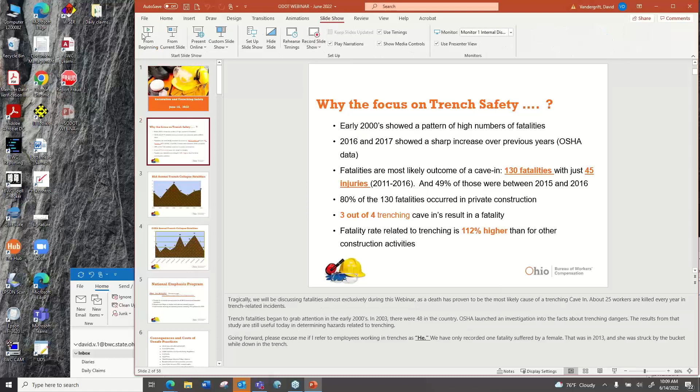Mr. Fitch, I have lost control of my screen, I can't forward the slide. Would you prefer we hand over presenter mode to David? I think it's a good idea. Let's do that. It seems it happened when I turned my camera off, and I tried turning it back on. You might have seen me on the screen, but that didn't change it. You'll just have to yell at me when you're ready for the next one. Thank you, very good, Dave. We see your screen. Good? All right, looks good. There we go, excellent. Sorry about that everyone, it's just been one of those mornings.

So why are we focused on trench safety? Tragically, we will be discussing fatalities almost exclusively during this webinar. Death has proven to be the most likely outcome of a trench collapse. About 25 workers are killed every year in trench-related accidents.

Trench fatalities first began to grab attention in the early 2000s. In 2003, there were 48 in the country. At that point, OSHA launched an investigation into the facts about trenching dangers. Some stats on this slide are from that study, and they're still very useful today in determining the hazards related to trenching. Sadly, many findings in the study revealed that the culture on site was a catch-me-if-you-can attitude.

We've already addressed that a little bit, I'm not going to dig on you there. Just remember that most crews are in very dangerous situations when they're in those trenches, and anything you can do to help alleviate or abate those hazards is something you really need to be focused on. I know you're always in a hurry, it's human nature, but that's something we need to keep going forward all the time.

We may often say 'he' during this webinar, and we apologize for that. It's not a gender bias, it's the fact that there's only ever been one fatality suffered by a female in a trench, and that was in 2013, when she was struck with a bucket while down in the trench, so it wasn't a collapse. Today we're focused primarily on the most likely and severe result of being in a trench accident, and that is a cave-in.

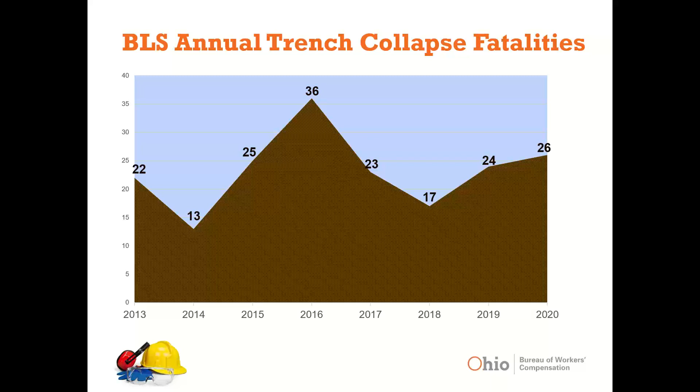There's a lot of reasons behind it, a lot of things we could look at and speculate - everything from, we know a lot of stuff was going on in 2020. Is it due to lack of training, lack of supervision? There was a lot happening right then. That's why I feel this year is a really big deal, especially with construction ramping up and a lot of folks getting back into the swing. It's really important this year to send home the fact that this is something we can prevent, something we can take care of and deal with, and reiterate the training and importance of trench safety.

Yeah, good. Thank you for that information.

The important thing to keep in mind is that we're having a lot of fatalities, and every single one of them is preventable. In all the history and all the cases I've studied - because I'm a bit of a geek and dig into these things, getting into case studies in the OSHA incident reports and litigation reports - they're all preventable. I only know of one that wasn't, in Cincinnati, I believe 2019, and that one would have been hard to prevent.

We had a supervisor who went down to check the tie-in before they backfilled the trench, and he didn't see his worker. He stuck his head around the corner on the side of the trench box to look up and communicate with an employee he couldn't see, and a big clod of dirt fell down and hit him in the head and killed him.

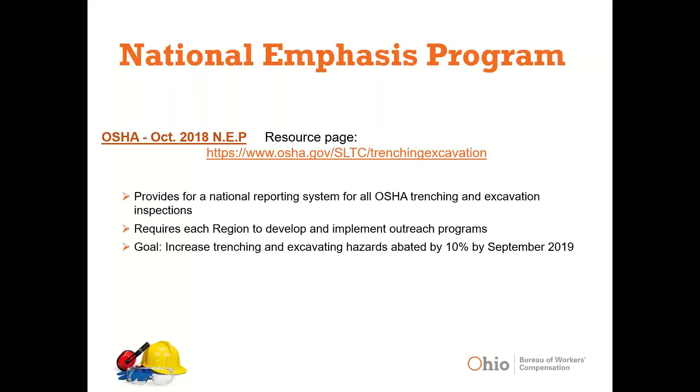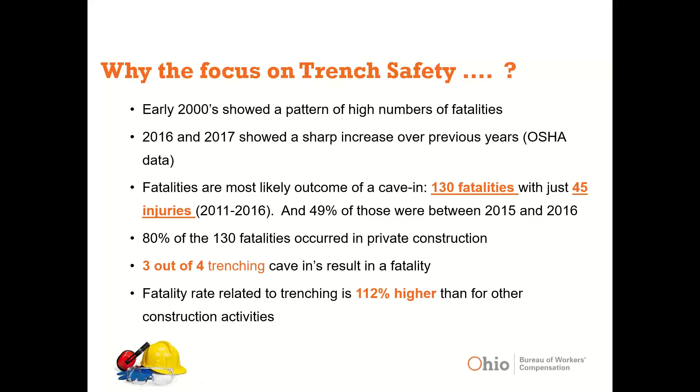I'm done with that slide. I don't know that Dave can hear me to go to the next slide. Let me see if I can. I don't know how I lost control of... Okay, my... So Ramona, oh now I got it. Can you see me? No, let me make you a presenter, and let's go back to having you present, and we'll see if that works. Yeah, I have it when I'm not in the presenter's mode, I have the toggle. Oh, and look, hey, it worked. Wonderful. Thank you. Thank you for redoing that, because somehow it connected. All right.

So that's a little bit about the national emphasis programs. What can happen if you don't do things well? What are the potential consequences and costs of these unsafe practices?

What is the potential cost? Criminal penalties are probably the biggest thing. It's huge that in 2015, OSHA switched from having prosecution procedures for fatalities in any given area referred to local judges, to referring those over to the Department of Justice. So you're going to have the DOJ on your case if you have a fatality that gets referred over to them by OSHA. I don't think PERRP in Ohio has that access.

But again, looking at these fines and those things, we kind of inferred it up front, but your concern is not really OSHA. It's going to be the civil suits. It's going to be the lawyers. It's going to be the public relations debacle.

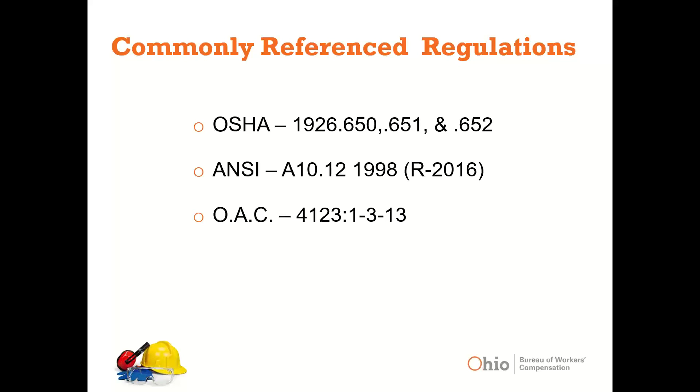ANSI is something to be concerned about because they have a much more in-depth set of standards that everyone has to follow, and they are not something you can just go Google. They are a private company and you have to purchase their standards, yet OSHA can incorporate an ANSI standard by reference even though you can't see it just by following it. You can follow OSHA standards, but you have to purchase the ANSI standards. That's why you want to log on to webinars like this and go to websites that have the requirements listed, because that is the only way you're going to see ANSI. And ANSI is extremely detailed with a lot bigger requirements, and you're expected to know that as an employer.

So ANSI requires an excavation safety and health plan. It's a written safety and health plan developed by the contractor for excavation work, describing the requirements and procedures to be implemented. How many of us do a written safety and health plan before we get into that hole? You should be doing a checklist, and it should be on paper. Is that set in the standard by OSHA? Not really. But guess what's going to be the first thing an OSHA inspector, or a PERRP inspector, asks for when they show up on a site? They're going to ask you, did you inspect your trench before entry today?

And today, this morning, is a perfect example. We had torrential rain roll through here last night in Northwest Ohio and all of Northern Ohio. I don't know about Columbus, did you guys get it down there? Yes. Okay, so can you hear me now, everywhere? Welcome back, Dave. Thank you, I heard a boom and then we lost everything. I don't know what, somebody's working on something somewhere, I think. Hopefully somebody wasn't digging a trench somewhere.

Oh, hopefully that was a patch.

I was telling them this morning is a perfect example of why you want to do a pre-entry inspection, and you want it on paper. So when I go onto sites, it's the first thing I ask for.

Especially last Monday I was on a site. We'd had rain again. We'd had a dry spell for two weeks, and then torrential rains on Saturday and Sunday. So we asked for the trench inspection paperwork when we show up on site.

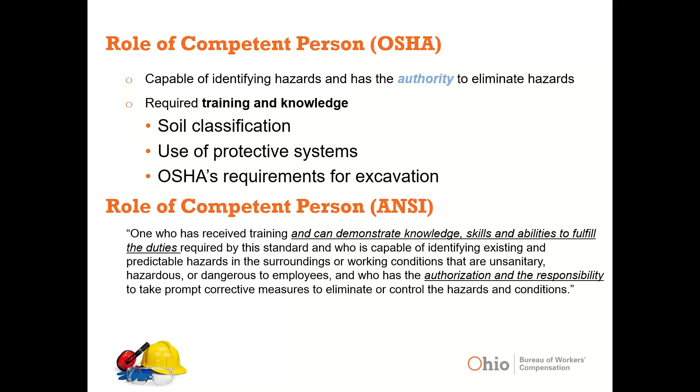Very true. All right, so Raymond, do we have the ability to do a poll here?

Well, let's just try it out. They can answer in the questions box. If not, we could just have everybody throw them in the chat and see what everybody's answers are. And again, we apologize to the audience, we had power problems up here today. Well, you saw that with Dave. And I'm having accessibility issues, I emailed these polling questions this morning, and then when we got on to start the webinar, we found out I'd sent them an hour or so earlier, and they didn't come through.

Yeah, well, just ask the question, put it in the chat if nothing else. Just, what is a trench? What do we think a trench is? The questions box is open, and already we have participants sending in responses, so that's good. Go ahead, Dave. Is it an excavation deeper than wide? Is it a hole in the ground or a depression in the ground beyond 3 feet?

Okay, we'll give everybody a few seconds here to type in their response, and we're off to a good start so far. This is why we love working with ODOT. When they ask us to do this, I said these guys are so slick, so technologically advanced and quick on your feet, I'll work with you any day. Well, thank you so much. So here's what we've got so far in the questions box.

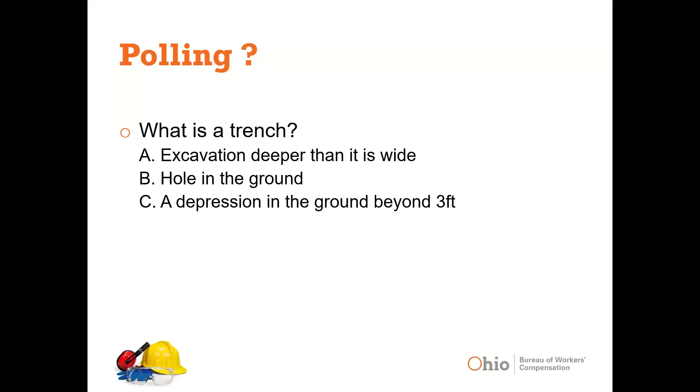If you have questions about that, Mona, flip to the next slide. We created these micro videos on YouTube, there's links for them out there, maybe we'll share them and show you guys later on at the end. There's a short video that goes through what a competent person is, the intro, and all those kinds of things that answer those types of questions. It's a YouTube video we created, 3 to 4 or 5 minutes long at the most, with a little bit of an assessment at the end if you want to take it.

A lot of times if you don't know how to use something or how to do something, where do you go? YouTube. I caught myself over the weekend messing around with one of my old Volkswagens, fiddling with the clutch, trying to find torques and this, that, and the other. Guess what? I found somebody on YouTube telling me how. Like a lot of my construction guys say, you're spending a lot of time on YouTube anyways, I might as well get some work out of it. There's some beneficial things you can go to and answer some of those questions.

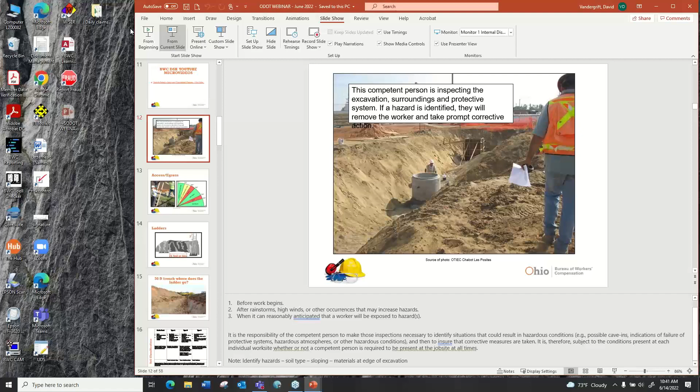Okay, well let's pass presenter mode back to Dave. All right Dave, I'm on number 14 right now. Yeah, I've got it up. Slideshow - I really think this is the weather going on because we did not have, I think a lot of lines got damaged last night. We did not have these problems last year. Yeah, it was quite a terrible storm last night. All right, there we go.

Thank you. So to answer, you guys did a great job in the chat and went above and beyond with adding some additional detail. So we're just looking at what is safe access and egress, and you want that ladder within 25 feet. Anytime that you're down in there, you have to be able to run to the left or the right, which means the ladders can technically be 50 feet apart, but you always have to be within 25 feet of them. And then also, if you have structural ramps or runways, they have to be uniform in thickness, joined together in a manner that's not going to fall apart, and secured to each other.

So common sense prevails here, I hope. But there's a little chart there that you're going to have when you have your handout pulled up and printed out, and it gives you a better idea of what you want to use. We often see ladders used at that 75-degree slope angle - that's most common, ladders.

Yeah, I like the old wooden ones that you can hang on the wall and put flowers on as well. As a woman, I think they're beautiful. And they, you know, you can throw them down in a trench too and walk on them, they're just so versatile. If you're looking at this picture, I just have a feeling it might be staged with all the thumbs up.

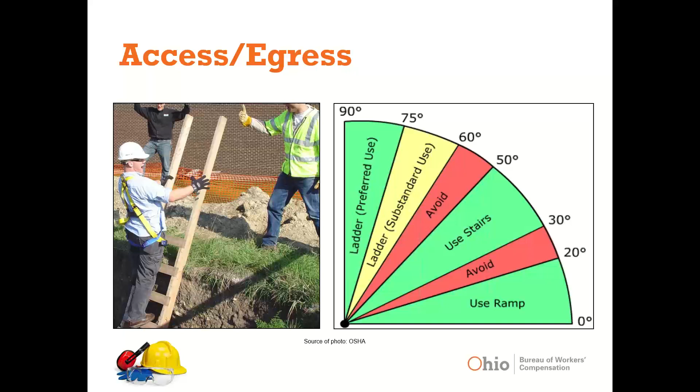But I asked this question - I'm still trying to figure out, is the trench deep enough that he needed a fall harness? I'm just asking. But anyways, Mona brought up the 25 feet, and of course it extends 3 foot beyond the cut. So that was what we were talking about.

So I just wanted to ask this question. Let's just say this is a 50-foot trench. Ignore the soil piles that are way too close to both sides. Where would you put the ladder in this soil pile? In the middle? At the end? Where would you put it?

Okay, the questions box is open. Would it go dead middle? Would it go at the end by the excavator? Or would it go the end by us at the bottom of the screen? So several, if it's a 50-foot trench, several people have said in the middle. Yep, one person said use multiple ladders.

Okay, now here's the time when I can honestly tell you everyone is right. Because truthfully, if it's a 50-foot trench, you need just to make sure you have egress to it. You need to have access to it. So if you're working on one end and it's going to take you a long distance to get to the other end, you have to have it at least within 25 foot.

But if going through this trench, you're going to have a hard time getting to the other end, sure, we should have another one. Or have two. Or you know what, better yet, have three. The better thing is to make sure you have access to it. We always want to talk about the egress, but we also need to make sure that individual is able to get to it and has access to it. So two ladders might be the answer to that one.

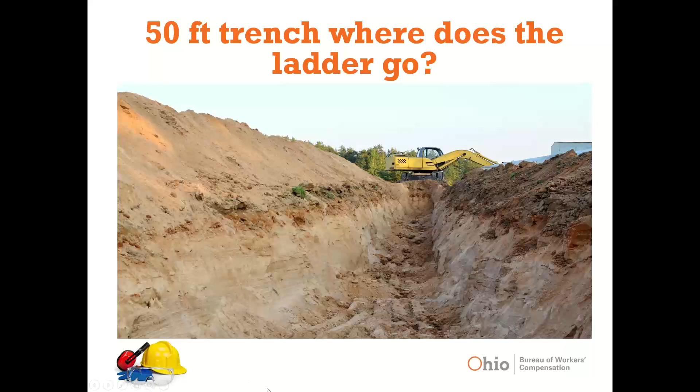All right, thank you. Well, so on this particular busy slide, I just wanted to mention a little bit about soil classifications. This is not a competent person course today. Please put in your notes, you are not going to be a certified competent person when you leave the webinar today. There's a 6-hour course, I think, provided by several people across the state. They do have some online. I personally don't feel this is the kind of application you can do online to go learn to be a competent person and get the feel for soil online.

I would not ever offer a competent person type situation that way, but they're out there. And today does not count as one, but on our website under the resources tab, we have a list of well in excess of 10 providers doing competent person courses across the state. So we're not getting that deep into this today. But soil classification is just some things to keep in mind.

OSHA has 4 categories, but where do you find information on how to classify those? It's in Appendix A of the excavation standard. But more importantly, it is to know that they can and do change, that you can bounce back and forth between a B and a C depending on weather and humidity and water levels.

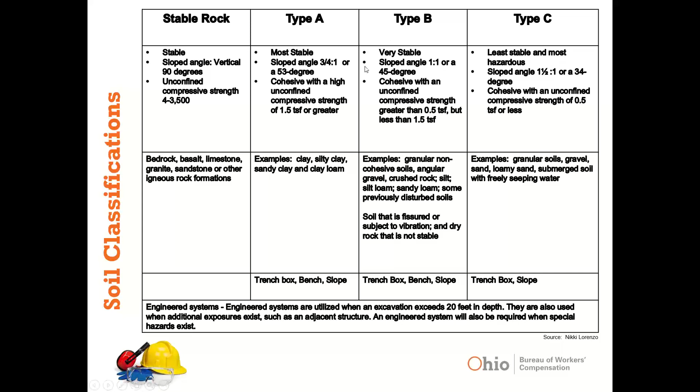You can bounce around, and that's why the competent person, we ask that you always do 2 samples of the soil test from different parts of the spoil pile where you're grabbing your soil. And that's why a lot of the folks I work with, a lot of times they just always say it's classified as C, but you need to be aware that there are other classifications. Even though you're classifying as a C, this is a good refresher for a lot of people. It's just to notify you that there are 4 different kinds of soil.

This is a really good visual analysis of what in the world. Yeah, that's a good layered view. Absolutely, yes. And the things the competent person will also look for is, is it granular? Is it cohesive? Is it layered? You want to look at the surrounding area.

Are there utility lines? Are there surcharges, or what's the word I'm looking for? Well anyway, is there sources of vibration, if there's weighted areas vibration next to you, vehicles, equipment, tractors, those kinds of things. And something else is anytime it's been previously disturbed, that automatically leads to a little less cohesiveness because it's been dug up before.

So if you go out and look, you'll find that utilities have been placed in the ground, or along the sides of a roadway or anything like that. There is very seldom a place where you're going to be doing an excavation that has not been previously disturbed.

So we really are never going to see Type A in Ohio. In Southeast Ohio, you're running more towards coal seams, sometimes shale. In the Toledo area, we're looking at sand, and it can be so unstable that the minute you're digging it, especially if wet, it's like whipped cream. It just starts falling back in on itself the moment you pull the bucket away. So it can definitely vary.

We're basically going to have B and C in Ohio, and those are the ones to focus on. If you tell someone it's an A, you could get yourself in trouble. We don't have anything that's stable in Ohio.

Unless you're in Nevada or the Rocky Mountains, which right now, as you may have heard just yesterday, aren't stable either. They just shut down Yellowstone National Park. A lot of the areas around, if you look at the video, they've got mudslides and things going on, with shale and rock coming right down the side. So I would question if A ever exists, especially when you take into account the fact that it can't have been previously disturbed.

Here's a good example of a manual test for a soil sample. Basically, it feels like a little kid. A lot of times, if we were in person, we'd pull out the Play-Doh, a pocket penetrometer or a shear vane, and do a bit of testing with that. But you can also do, and should do, thumb penetration, ribbon tests, things like that to determine the cohesiveness of the actual soil samples.

It's good to be able to understand those. A lot of times it's difficult to find what you're looking for. That's why a lot of the folks we deal with just go straight to a Class C, because they're not finding what they need for cohesiveness.

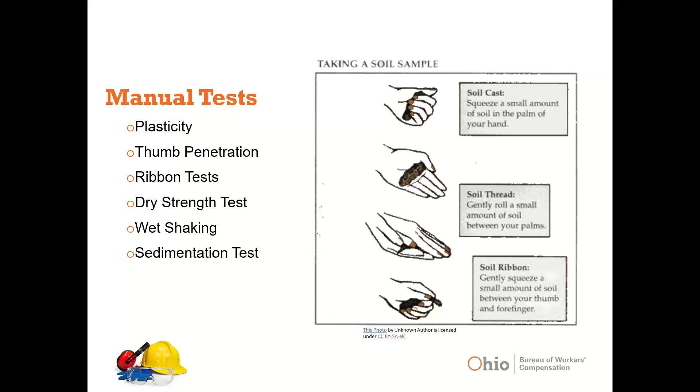Great points. Every method has its advantages and disadvantages. The senior people who've been doing excavation, trenching, and soil testing their entire life, most of them I speak with, do not like the penetrometers because the springs can go bad and you'll get a misread. So they rely on what they know so well, which is what their hands are feeling in that soil.

Plus those shear vanes and pocket penetrometers, the thing with them is just like any other tool or piece of equipment or measuring device, it all depends on how they're cared for. If that pocket penetrometer's been bouncing around in the toolbox underneath the seat of the truck, kicked all over, and not taken care of properly, that does a lot of wear and tear on devices and equipment.

Dave mentioned this earlier, I believe. Sometimes even if it's under 5 feet, you still have to assess and find out whether or not you need protective measures, and a lot of times that's where shoring devices and things like that come in.

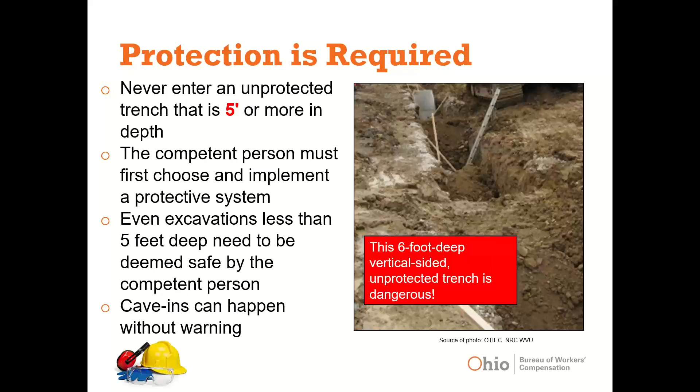There was a couple of things we were talking about, the shoring devices, sloping and shielding. There's been some nice stuff coming out.

I actually ran into one the other day. One of my townships was reaching out, looking for the trench grant, and he asked me, 'Hey Dave, have you seen this yet?' I said, 'What is it?' He sent me a video, and it's actually a blow-up shoring device. It's like a mini trench box that you use air with cross braces to form. It actually fits in like the trunk of a car. It was rather surprising.

The joke was, when he first said that, everybody I talked to was like, 'So is that like an air bouncy house in the ground?' And we're like, 'Well, no, not like that, but the walls get very rigid, it's tested, it's all that good stuff.' But it's another option they were looking at, made for smaller excavations. Much like shoring, you can get it in a different size to actually fit your needs.

Great points. When looking at protective systems as well, just remember that there's certain criteria that has to be met. You're going to be looking at the depth of the trench. You might have a professional registered engineer involved. If it's over 20 feet, you should. And what is always going to be used as the gold standard of whether or not you met requirements for protective systems is the tabulated data, which I think is in an appendix to Subpart P. So tabulated data is language you should be hearing on a trenching site. If people don't know what that is, then we kind of know they probably didn't get good competent person training.

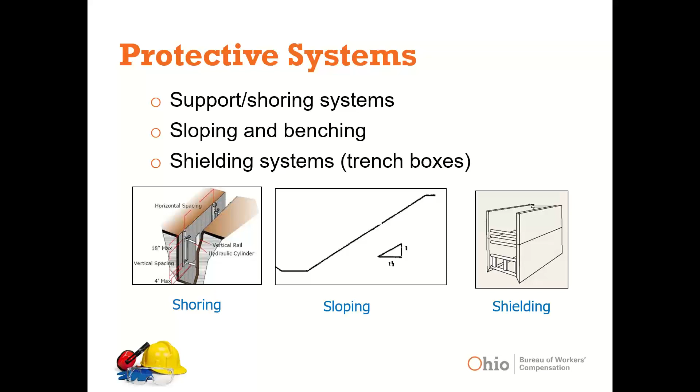All right, got another polling question. Who should conduct a trench inspection on your work site? We have answer A, which is anyone entering the trench. Answer B, which is the excavator or the equipment operator. Or answer C, the competent person.

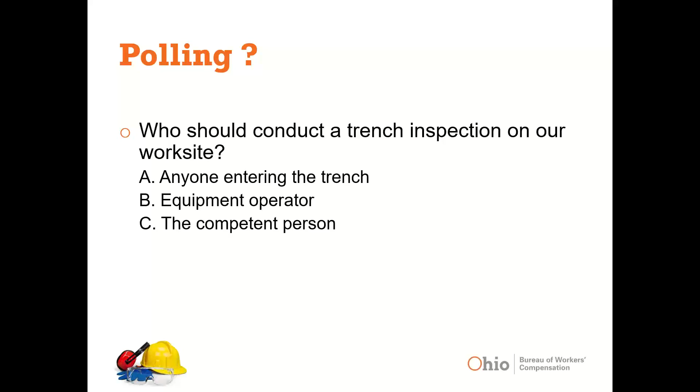All right, we're just going to hit a little bit about sloping and benching. I've not seen a whole lot of it recently because a lot of people don't really want to open up this much ground, other than something brand new or something very large where they're tearing a lot away. But this is a good question: is this slope safe for any soil classification? The answer, probably not.

When we look at this chart, one thing I always like to point out is if you always treat it as type C and slope it at 34 degrees, you will always be safe with anything. Dave and I had this discussion yesterday when we were preparing for this class, looking at that particular sloping.

Is that 34 degrees or not? I think it's not, but you would have to be on site to see. To us, it doesn't look like it's sloped properly to the 34 degrees, but who knows, maybe it's classified differently unless you're on site. That's why we don't really pass judgment too harshly, unless you're on site, you're the person there, like Dave said, you're the person getting down in the trench.

You're the person who's behind the excavator controls. We don't really judge too heavily, but OSHA will. They're going to come on site with measurement tools, and what they use is a string for the 5-foot depth. They have a string with a weight on the end of it, and they drop it down, and if it hits bottom, you guys might do the same thing, then you're at 5 feet.

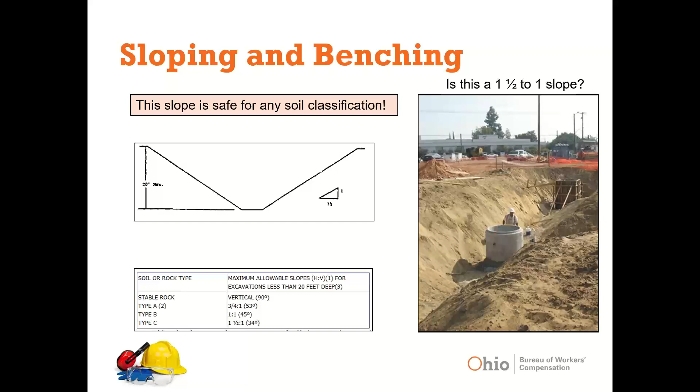This one, there's so much going on here. This is an OSHA photograph. We do use it in a lot of our presentations because it's busy and there are so many particular hazards. But I guess what my question would be, if you put it in the chat, is what do you feel is the greatest threat here? We get asked that a lot when we're on site, what's the worst thing here?

So to prioritize, and it's something that's good to do when you're on site, it's a good skill to have. What's the worst thing you see here in the chat, please? Okay, yeah, and the questions box is open.

Unfortunately, I've seen this a few times, and I can just say the guy down at the bottom making sure the fall of the pipe is correct, adjusting it with a little bit of gravel on top and underneath. I'm just saying, I'm familiar, so there's a lot of hazards going on here.

What are they saying, Ray? Well, initial responses are, several are saying falling stone or falling load. Several responses are saying cave in. One response says equipment over the hole.

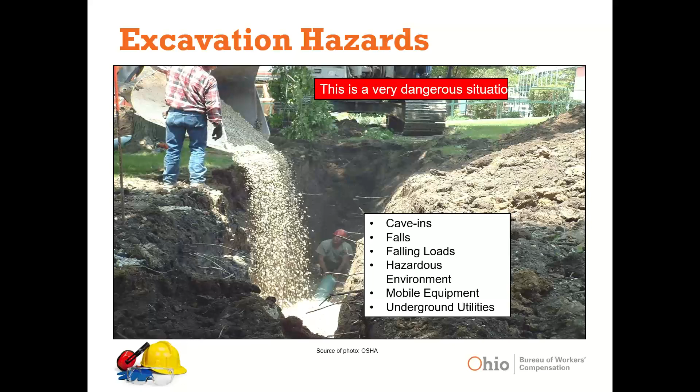Yeah, there's a whole lot. This is what I was talking about. We really don't have a good measurement on the depth, but being on your hands and knees working with the pipe at the bottom of the trench obviously puts you at more of a, you know, puts you at a deeper rate to where you're having a more heavy risk. So good answers, yeah, excellent.

I always like this one because it always talks about one cubic foot of soil weighing between 90 and 130 pounds. The other one, because me being a Volkswagen kind of guy, dune buggies and whatnot, I always hear the comparison made when a trench collapses: it's like parking a Volkswagen on your chest. And if it goes at 40 miles an hour, it's like getting hit with that Volkswagen.

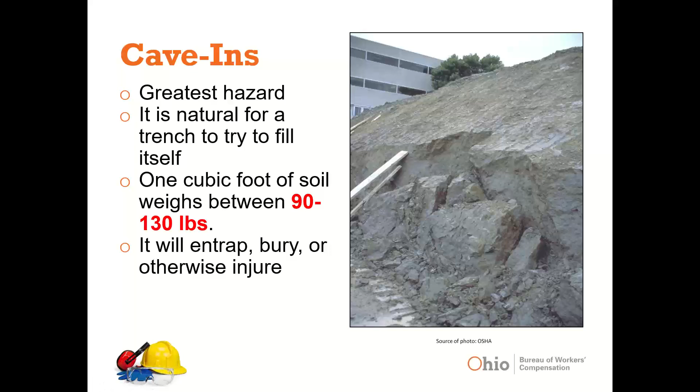This is another quick one. We got a trench, got an excavation open, how do you get across that? Do you walk all the way across, or do what I've seen many a times, they get close to the edge and then jump? I've seen that way too often and way too many times.

That's part of the standard that was one of the few applications to the standard that was changed. That's the one I mentioned earlier that was changed in 1994 as an amendment, and it's one of the few changes they've been able to make to that standard.

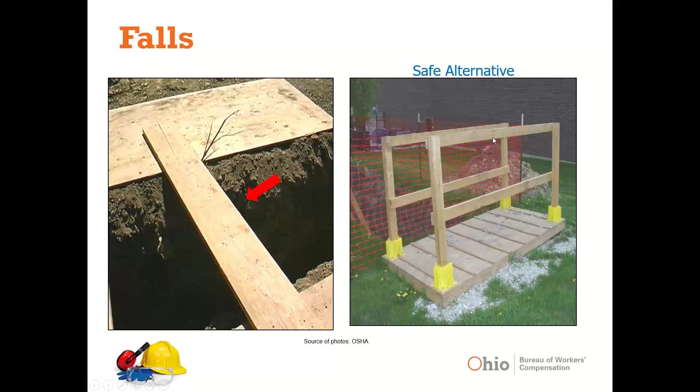Those are nice little pop-ups like you're pointing to right now, guardrails you can disassemble, and just assemble them real quick on site and be ready to rock and roll.

Also, the other big one is digging next to structures. A lot of times the first thing that comes to mind is digging along the edges of basements, but also just digging along the side of any structure. That ground is supporting that structure, and once you get to a certain depth, you're not supporting it as much anymore.

I don't know that we have any basement diggers in the audience, but that example is just the only thing I could think of off the top of my head.

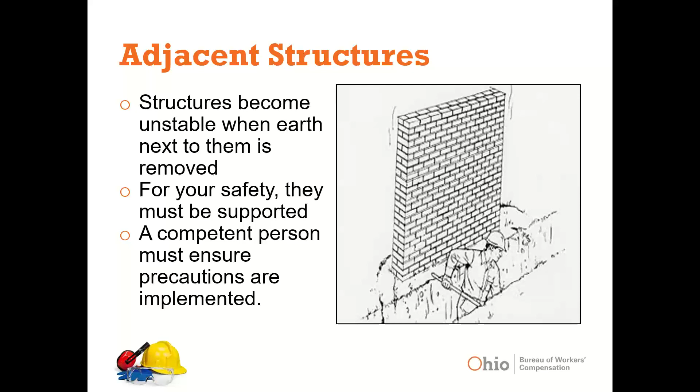That's where the single biggest case in Ohio originated from, a basement digging operation, a tie-in in the Cincinnati, Hamilton area that's now the center of a $20 million lawsuit. That's a dicey prospect, digging next to a newly poured wall, and there's no easy answer. It's not something you want to jump in and try your luck on. That's like Russian roulette at that point.

Exactly. Here's some of our friends at Ohio 811. We've become really good friends, myself with George Gillespie and a couple of those guys that run around the state, helping make sure you're doing your one call, calling ahead and calling before you dig - that's a very important thing.

One of the best pieces of advice I ever got from George, who's been around a long time with a lot of experience - even if we've been called, even if they've come out and the markings and flags are where they need to be, take the time to get out of the truck, no tools in hand, not planning anything other than looking, and walk where you're actually going to be making the excavation.

Look for things like poles, conduits going into the ground, light poles out in the middle of someplace - taking in all that's there on the site, seeing if anything maybe got missed, verifying that the drops and the ups and downs for the electric and those kinds of things are all taken care of.

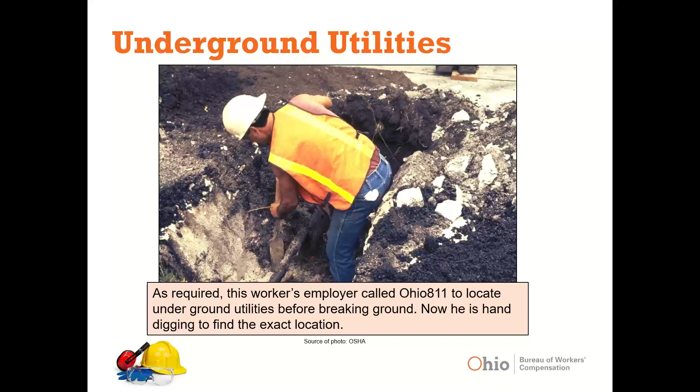I think we lost Dave. Can you hear me? I can hear you. Can you hear me? Yes. Yeah, we can hear everybody. Oh, okay.

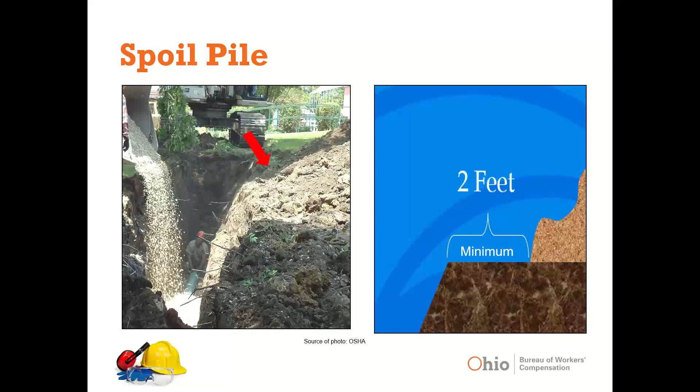Making sure that spoil pile doesn't get into that 2 foot minimum area. The other big one is making sure stuff isn't laying near the trench that could fall in - tools, equipment, all those things present a hazard as well. Making sure there aren't other items laying within that 2 foot range that could fall in, like plywood, roadway plates, cross braces, tools, equipment - all those present a danger and a hazard.

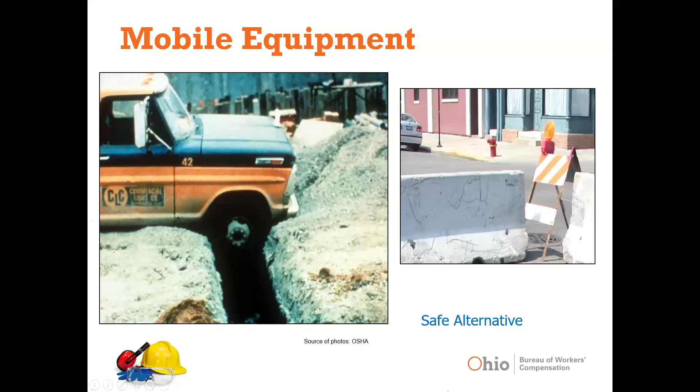Where's Raymond at? Is he on here? There, my good friend over there. He's the man on this. You have him available, use him. Ask him questions, have him explain things to you. This is a very, very important part of the digging. A lot of times it's happening on the sides of roadways and places that are hazardous. This is a good time to promote some of his stuff.

Thank you. Yes, we talk about the use of barricades and drums, or even put a wall of cones in front of your trench - anything to keep people from driving right into your trench. Unfortunately, it happens in between the egg muffin and the cell phone and the radio - it seems like it happens quite a bit. So keeping people out of those trenches and work zones is a pretty big ordeal. That's the added hazard of trenching and excavation.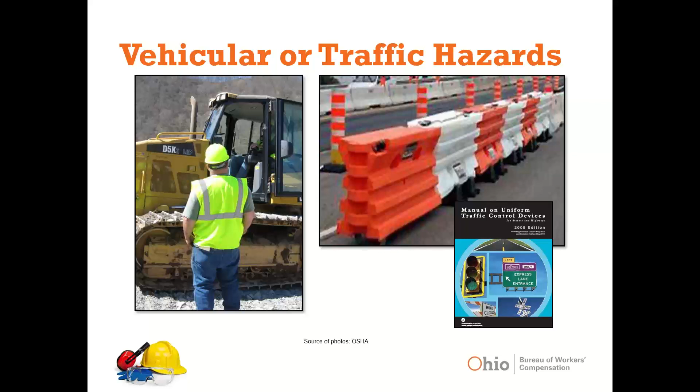Yeah, and when we're in the field, we so seldom see that done correctly. Unless it's a very large contractor, almost 95% of the time if it's a smaller employer they are not doing that correctly, to their own detriment. Think about distracted driving these days - I had a motorcycle and sold it about 2 years ago, and I miss riding it, but I do not miss feeling like I was going to turn into roadkill. I was losing friends to it as well, it just wasn't worth it. This is not the laid back Sunday driver community we had 30 years ago, with all the distractions and texting, and people being so rushed running from one place to another - their eyes are just not on the road like they once were. Exactly.

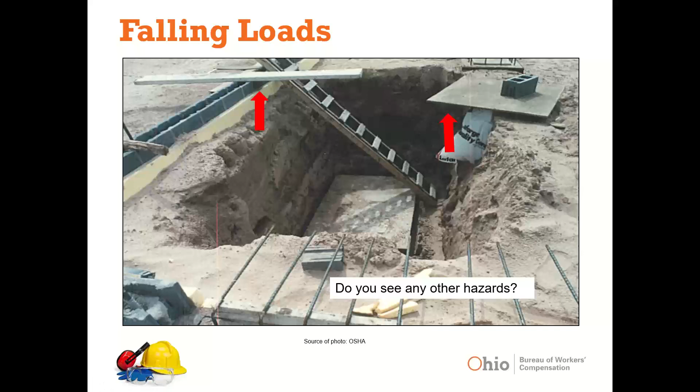Then we always bring in, well, the water's in there - how do we get the water out? We typically know that takes a pump, right? Well, if that pump is gas operated, what are you creating in that hole? Therein lies another issue. You should have a competent person testing any excavation deeper than 4 feet. That number can come as a surprise, but there are so many things that can go wrong, and there are different levels of exposure - some vapors are heavier than others.

Some will sink, some will go up out of your trench. Wind, sometimes if you have a vehicle parked near the edge, the wind can blow the exhaust into the hole. There's a lot of variables there.

It just goes to show that construction is such a complex undertaking, and that it changes by the minute. I think it's one reason Dave and I like it. If you go do a factory inspection, it's probably going to be the same 5 minutes after you leave as it was when you got there, but construction changes by the second.

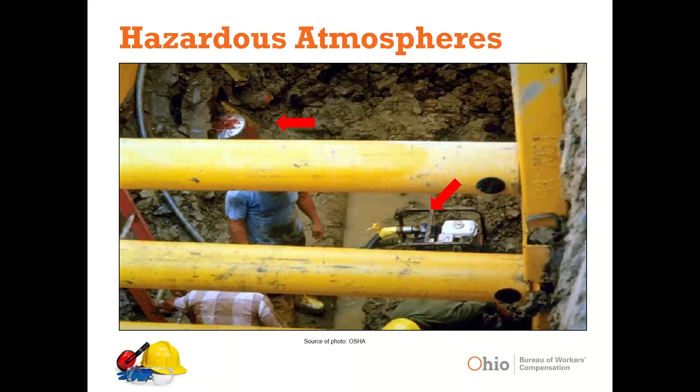The vehicles, excavators, track hoes, and things like that, you need to pay attention to where the exhaust is going from them, and make sure the exhausts are sealed up, because just because the tailpipe's pointing away from the trench doesn't mean you don't have something busted halfway through. I only say that because I've seen one of those. I was reading about one.

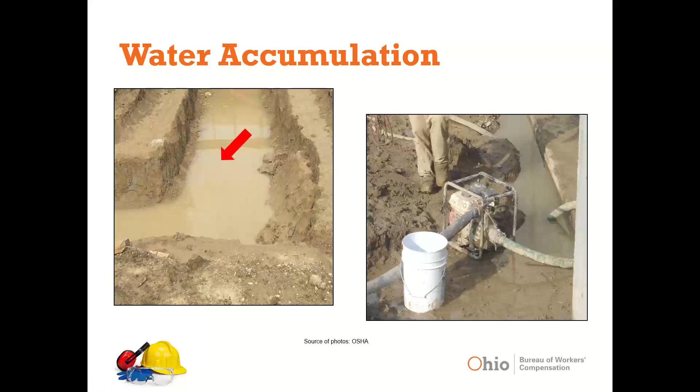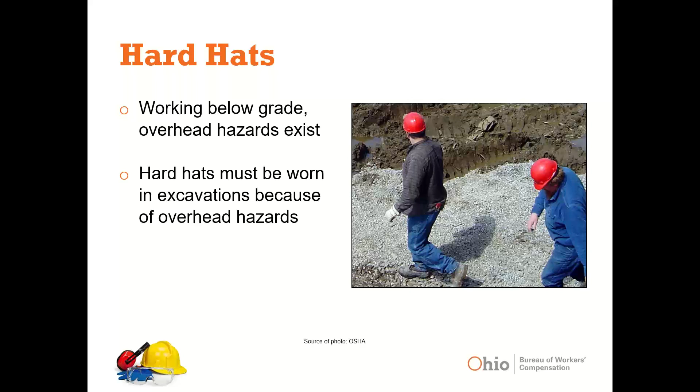Hard hats. Yep, you're below ground, you're below grade. Anything that can come down, you've got a hazard you need to protect against. So hard hats need to be worn in excavations because of the overhead hazards. Just wanted to reiterate that one.

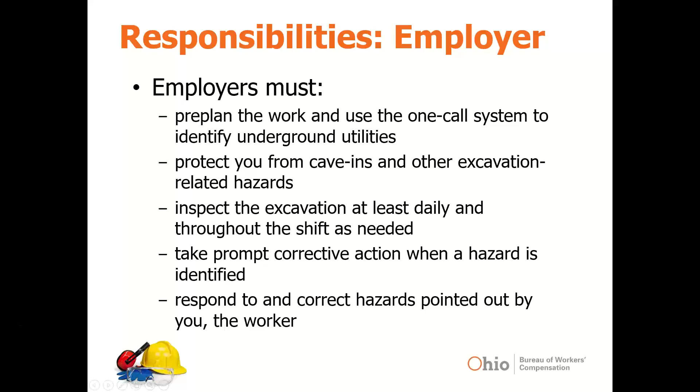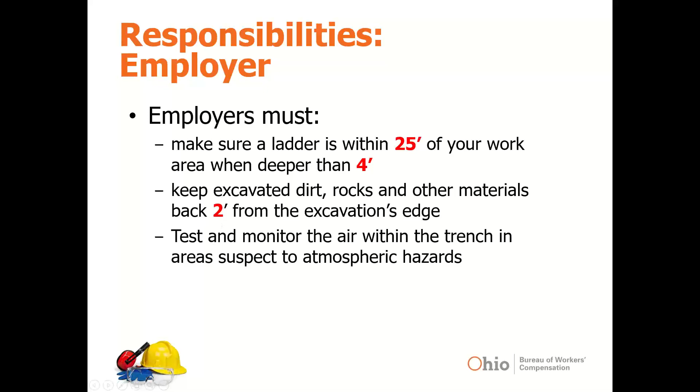Now this one's just for reference sake. There's some employer responsibilities: make sure you're making the call, make sure you're protecting against cave-ins, take corrective action, respond to hazards pointed out by anybody working on or around the trench. Make sure the ladder's within 25 feet of your work area anytime you're 4 foot deep. Keep excavated dirt back 2 foot. Test air, test soil, all that kind of good stuff.

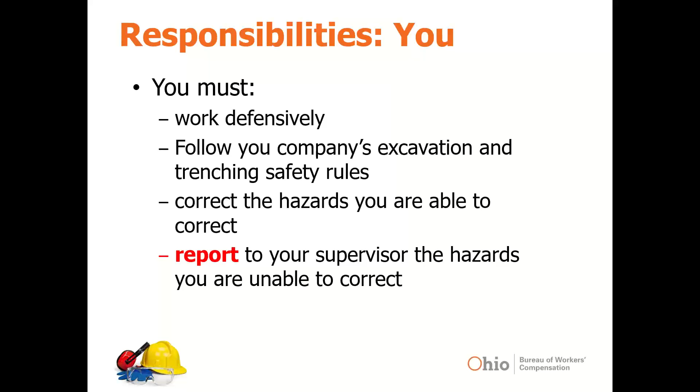But here's the big one. You also have a responsibility. You need to work defensively, follow your company's excavation safety rules, correct any hazards you are able to correct. And this is the big one: report any hazards you see to your supervisor. You need to let them know there's something there. Don't just walk on and say, well, it's not affecting me. It needs to be reported, it needs to be discussed. That way it can be rectified.

The minute you pipe up and notice a hazard and report it to your supervisor, a lot of people are unaware that once you've recognized the hazard and reported it, the employer is now responsible to assume responsibility to correct it. And if nothing else can be cited against that employer, OSHA can use the general duty clause, which requires every employer to provide a workplace free of recognized hazards. One form of recognition is an employee complaint. So just keep that in mind. Once that's been brought to the surface, once that pink elephant is flushed out of the living room, it's got to be addressed.

And I know I've hit it a bunch of times: never enter a trench more than 5 feet unless there's a protective system in place. Trenches less than 5 feet also require competent persons. So if you know you're going to be on hands and knees, maybe a little less than 5 feet, you might need something.

But here's another big point: if you're working inside a trench box or inside shoring, stepping out of the end of the trench box or shoring, you should not be doing it. You need to maintain yourself and your work inside of that box. If it needs to be moved for your work to continue, then move the box or the shoring. Don't work outside of the trench box.

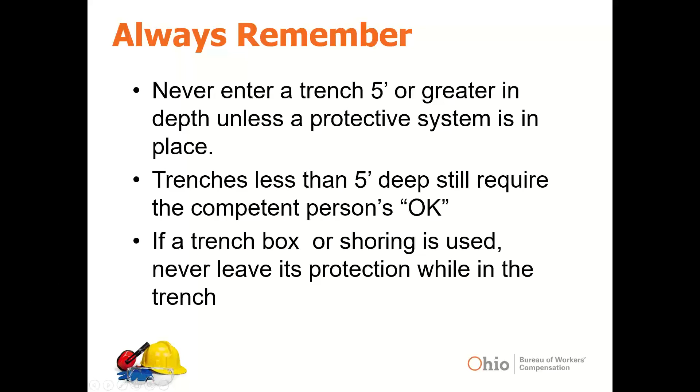This is one of the case studies Mona was discussing. This is another one of those fatality kind of things. It's sometimes a little hard to read and hard to grasp because of what happened with it, but yeah, that was a bad one.

The crew leader grounded the bucket, turned the machine off, and walked to a company trailer to check out blueprints. When he came out of the trailer, that was when he was told by one of the workers the trench had collapsed and there were 2 people in there.

And if you don't mind, Dave, I'm going to take a moment and talk a little bit about recovery. So we don't have a slide in here on it, but in the state of Ohio, what would your gut reaction be if you had a trench collapse?

It's probably going to be to call 911 and maybe try to dig somebody out while you're waiting on 911 and the rescue squads to arrive. But as a former EMT, I've spoken with some of the rescue professionals in Ohio who are out there still doing it. And right now we have 8 fully, and this is key, certified and equipped crews in Ohio to do trench entry and rescue, and that is certified and equipped.

So some people have gone through the training to get their CEUs, but they don't have the equipment. Some people were granted the equipment through a government grant and they don't have their training. So if you are in a remote area in particular and you call for rescue, chances are it will be a body recovery because it takes 4 to 6 minutes for the brain to start dying off at a cellular level and shutting down.

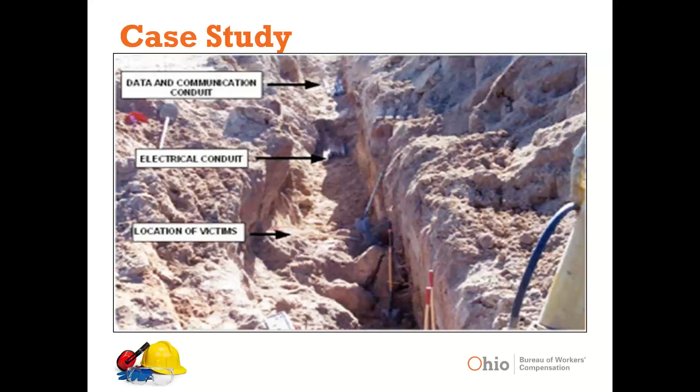So let's keep going. I think that awareness has come up. I think we are doing things better. I hope we affect the way that you approach everything on site, and I hope that anyone that was maybe thinking about taking shortcuts will change their tune a little bit going forward away from this webinar.

Yeah, I've got a couple of hazard recognition pictures I just wanted to go through real quick, and these are usually a good discussion point — hey, we see a whole lot going on here, we see a whole lot that's not right. But this one I just want to make one quick point on, and we'll move on to the next: how many people saw this and never said anything? How many people have been down there working and it's just what we do?

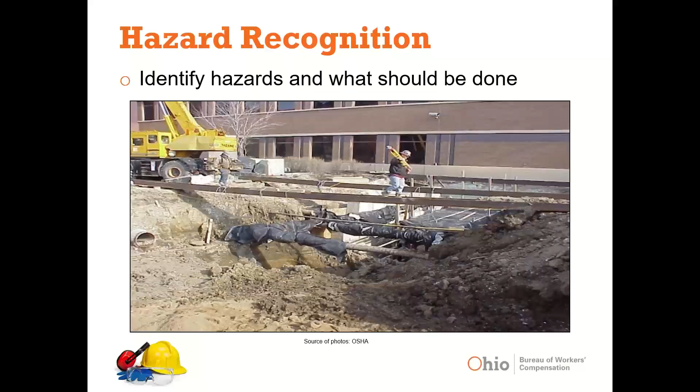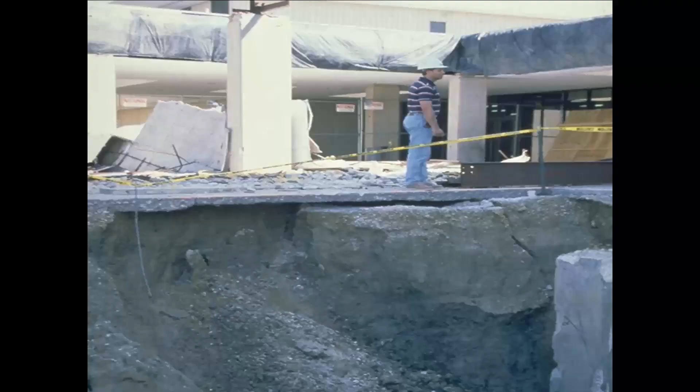Yep, these are ones we've gotten from folks and places — I think these were actually from OSHA. Here's another one, undercutting, step back. I'm thinking there's a little bit of an issue in this area, and it looks like there's some cracking and some such going on here. It won't be long before that piece there is coming down.

You know, and I like your point real quick, feel free to move forward here, but the cracks and fissures or something when you're doing that trench inspection can change from day to day.

If you look it up on YouTube, there was a video where six people got killed in a trench because they were standing too close to the edge, and there were fissures and the edge gave out from under them. Just watching what was going on.

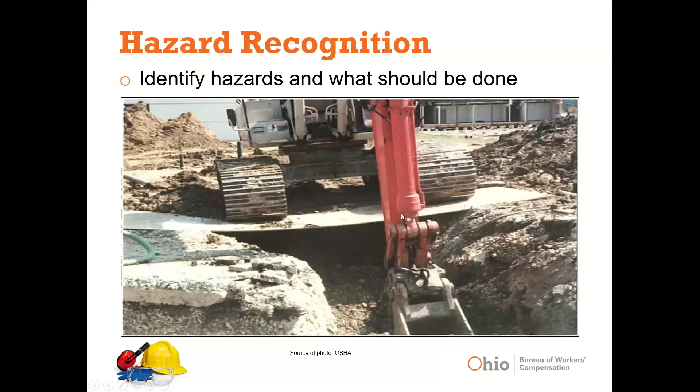I'm guessing that's not plywood in this picture, it's probably some roadway plate. But that excavator probably exceeds the GVW of that piece there. I'm sure many folks might have seen something similar to this.

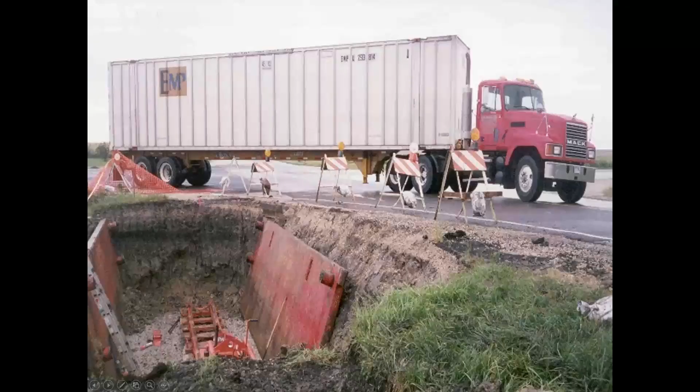And this one, what do you think, Ray? You think that's appropriate? I'm just asking. Yeah, it looks pretty dangerous. You're putting a lot of trust in the driver of that truck for the wheels not to come down into that hole. This is one where the trailer ends up in, not even trench shoring.

And all they had to do was scoot the barricades out another eight to ten feet at least.

All the vibration of that roadway, not to mention the weight of a semi compared to a car, that's going to do severe damage to this area, especially along sides of asphalt and roadways. You don't know what's underneath that asphalt necessarily and how much compaction happens. We get so trusting of things like that - we have this blind trust. If you're above it, you just go with it.

Here's the thing: when somebody says this is what we've done - and as someone who's worked a long portion of their career in public employment, I've done quite a bit of side work with other people too - it becomes a thing. Just because we've done it that way doesn't mean it's right.

That's why these kinds of trainings are good. I started doing some safety training because my former boss and mentor said, hey, you're going to be in charge of this maintenance department, these construction crews at some point - it would be worthy of you stepping in and learning some of this stuff. I actually started taking classes through BWC, and a few years later finished a degree in safety and health, and realized how much of a difference it made. Even just a little bit of awareness, a little bit of recognizing things - we went from getting guys hurt every two to three months to hardly going to the hospital at all anymore. It does matter. These kinds of things do make a difference.